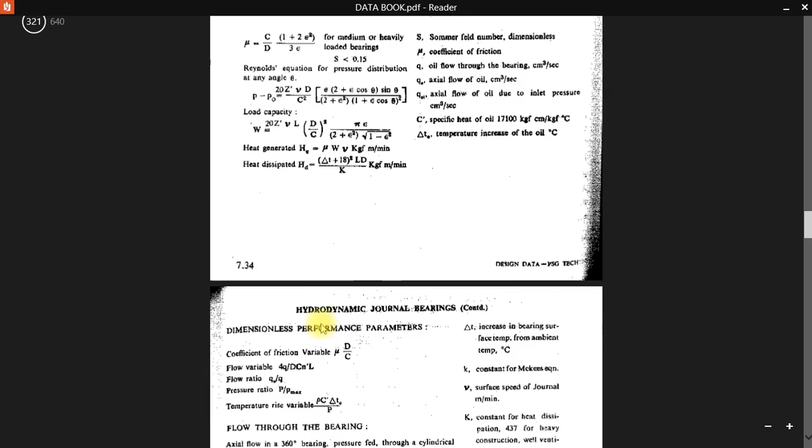So if I go back to our data book, page number 7.34, for hydrodynamic journal bearings, you can see the first formula available is the Sommerfeld number. S is the notation to represent the Sommerfeld number, which is nothing but Z dash N dash divided by P into D by C.

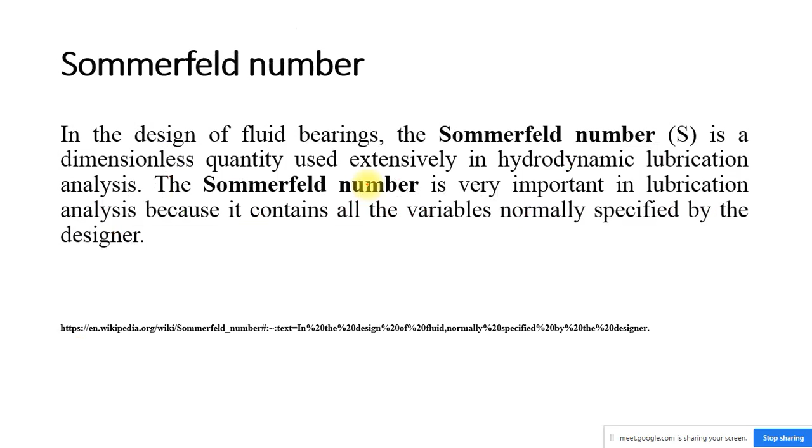So Z is nothing but the viscosity value. N is nothing but speed in revolutions per second. P is nothing but the pressure, D is nothing but the diameter, C is nothing but the diametrical clearance. So this is the definition of the Sommerfeld number.

Now let us see the difference between hydrodynamic and hydrostatic bearings. Before knowing about hydrodynamic and hydrostatic bearings, we will be seeing about fluid bearings.

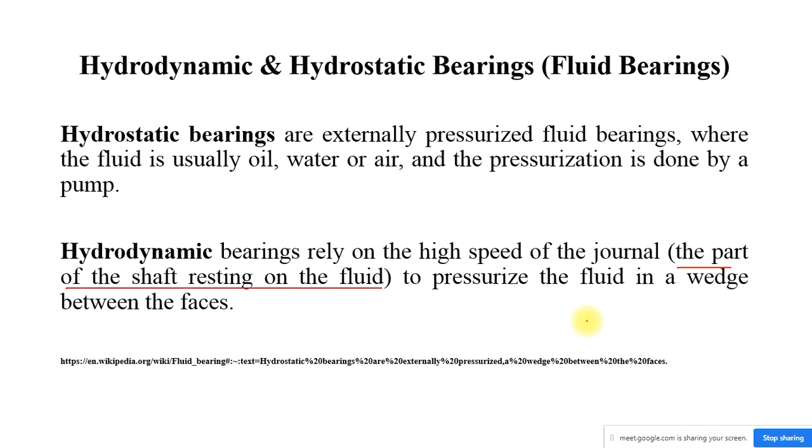Okay, so now let us go directly into a problem. Since I want to make it very clear, I will go directly into the problem for a hydrodynamic bearing. There is no difference between sliding contact bearing and hydrodynamic bearing - the only thing is it is a fluid bearing.

Either the fluid artificial cooling will be done in a continuous manner by hydrostatic, or otherwise the particular bearing will be placed inside a completely fluid environment in order to reduce the temperature. Okay, so let me go into the problem directly.

The following data is given for a 360-degree hydrodynamic bearing: radial load W is given, journal speed N is given, journal diameter capital D is given, journal length L is given.

So using this I can find out what is L by D. So I can write directly L by D is equal to 1. If it is not given in the problem, with the help of the journal diameter and the bearing length, I can write L by D is equal to 1.

So then they have given the unit bearing pressure. Even if this unit pressure is not given in the problem, I already told you how to find it out, which is P is equal to... there are some reasons why I am telling this, because if this data is not given, you should be able to identify it.

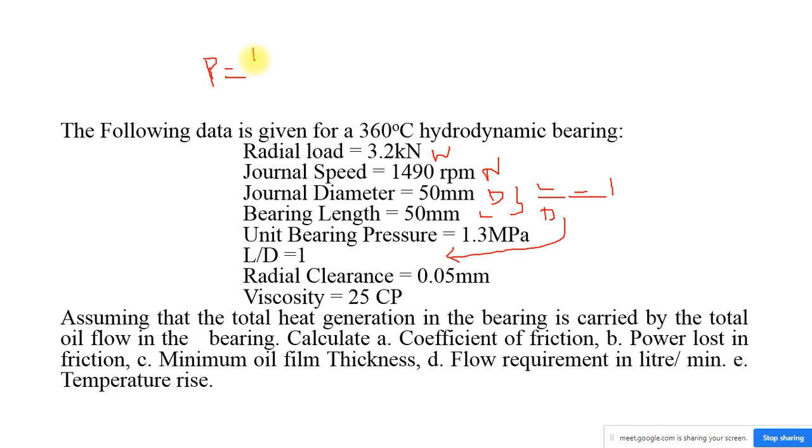So P is equal to W divided by L into D. All these three data are available - I know the W value, I know the L value, and I know the D value. If this particular unit bearing pressure is not given, this is the way you have to identify it.

Because I know the load value, I know the length value, and I know the D value. The next thing is radial clearance, which is nothing but C. The third thing is viscosity Z.

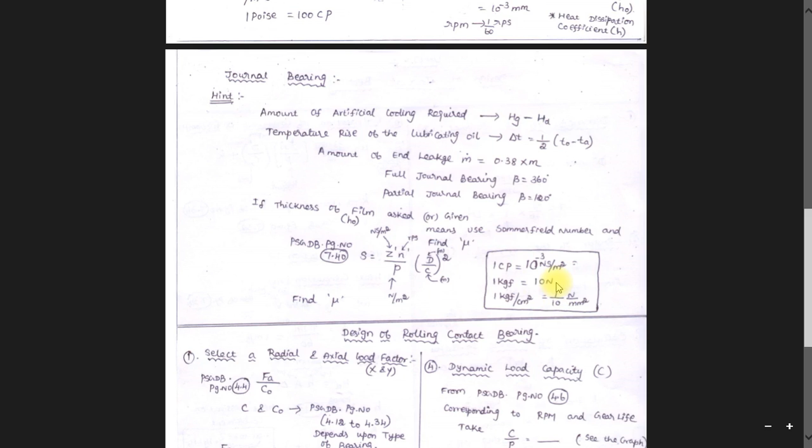Be very clear here. It is given as 25 centipoise, so the unit conversion is very important. To know about the unit conversion, Mr. Venkatesh sir has given a very clear note. See here, I hope it is visible to you. 1 centipoise is equal to 10 to the power minus 3 Newton second per meter square. I repeat, 1 centipoise is equal to 10 to the power minus 3 Newton second per meter square.

See here, the viscosity is given as 25 centipoise, so it can be written as 0.025 Newton second per meter square, which is nothing but the viscosity Z value. So everything is given very clear. You be very clear with this unit conversion, it is very important. If this part is wrong, the entire problem will be wrong, because the data book we use will be using the units in a uniform manner.

Assuming the total heat generation in the bearing is carried by the total oil flow in the bearing, so it is very clearly given that definitely I need the oil flow here.

So calculate number 1, coefficient of friction, which is nothing but mu. Power lost in friction, yes. Minimum oil film thickness, which is nothing but H naught. Flow requirement in liter per minute, which is nothing but Q. So temperature rise, either it may be del T or T naught value.

So when I read out the problem, I have been given the data: W is equal to 3.2 kilonewton, N is equal to 1490 rpm, D is equal to 50 mm, L is equal to 50 mm, unit bearing pressure P is equal to 1.3 megapascal, C is equal to 0.05 mm, Z is equal to 25 centipoise. These are the given data. As I told, what are the things to be identified, I have given over here.

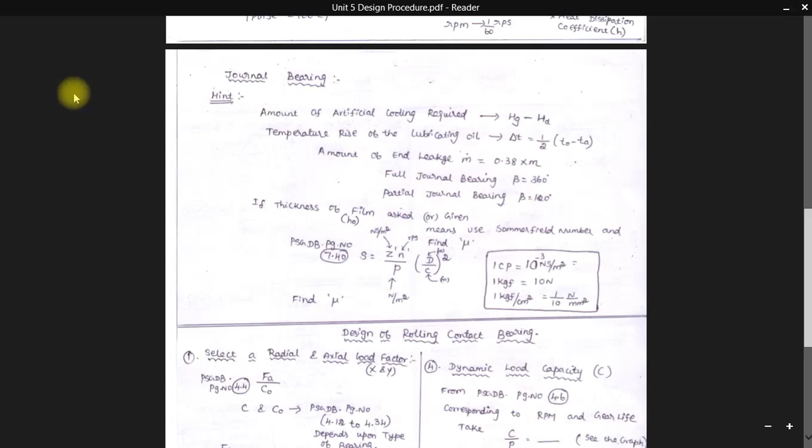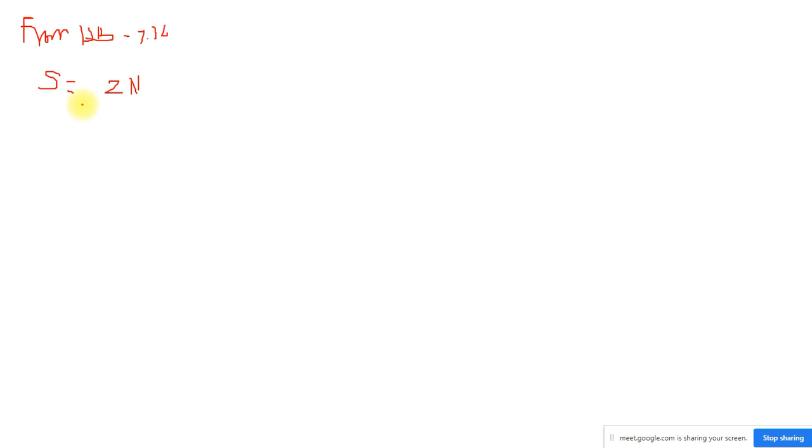So tell me what is the formula for S. You can go here and identify Sommerfeld number S is equal to Z N into D by C square, divided by P. So this is the formula. From the data book I am writing the formula: Z N divided by P, D by C the whole square. The reason why they have given a small n is that n is nothing but the revolution per minute should be in revolution per second, or the speed should be in revolution per second. That is very important.

Now I know the Z value, which is 0.025, and the revolution per second I can write here: the speed value given is 1490 divided by 60. The value of pressure is given as 1.3 megapascal, which I have to convert into Newton per meter square, so 1.3 into 10 to the 6. I hope you understood the unit conversion—it is given in megapascal, I need it in Newton per meter square. Then, into what is the D value? 50, and what is the C value?

I hope you are using your calculators and calculating it. If I identify it, the value of S would be 0.477. As I told in my explanation, it is a dimensionless value, it doesn't have any unit. I hope you understood.

I have simply solved the given data available, and what I have done differently is the RPM has been converted into revolution per second by dividing it by 60. Similarly, the pressure given in 1.3 megapascal has been converted into 1.3 into 10 to the power 6 Newton per meter square. With this I have found our Sommerfeld number.

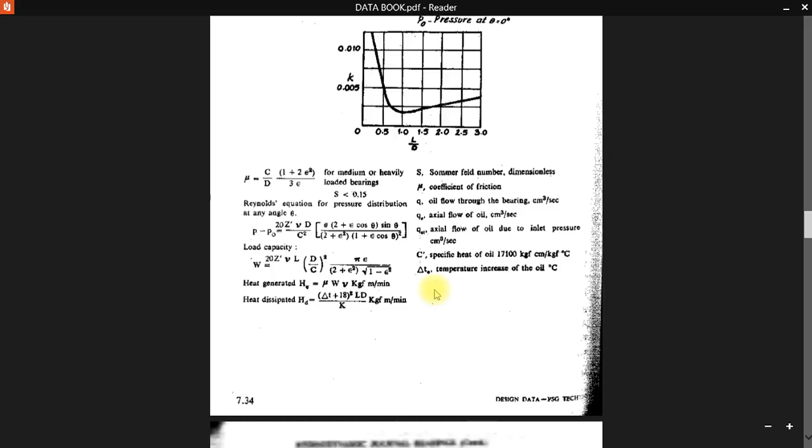Now we have to go back to our data book. Here the data book usage is very high. The L by D ratio, what we know, is 1. See here, I'm on page number 7.36, you kindly write it down. So from data book page number 7.36, for L by D is equal to 1.

For L by D is equal to 1 and S is equal to 0.477, you look in this particular column whether it is available for 0.477. When I come over here, you have 0.264 and then you have 0.631. Can anyone tell me what I should do to identify the value in between these two? I am having 0.264 and 0.631, but my value is in between these two. What should I do?

Yes? Sir. Yes, what is the method? You have studied this in your mathematics, you have done it in your thermodynamics. Yes, very good. What is that?

Interpolation. Yes, very good, interpolation is the method. If any value is in between these two, I have to do the interpolation and find out the value. I hope you know about interpolation.

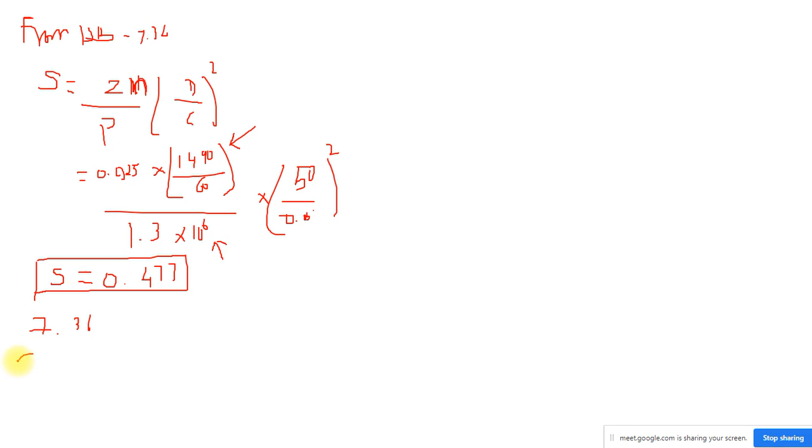So from data book page number 7.36, for S is equal to 0.477 and L by D is equal to 1, by interpolating - very important, by interpolation, which I hope you know can be done on your calculator - I will tell you the values. After interpolation, mu d by c is equal to 9.87, and similarly 4q divided by d c n dash L is equal to 3.75.

The reason they use n dash in our data book is that it is revolution per second. Then I need the other value, 2h0 by c, which is equal to 0.716. So all these values have been interpolated and identified.

Let me show you again. I need the 2h0 value, which will be around 0.6 and 0.8, so between 0.6 and 0.8 I get 0.716. Similarly, mu d by c is between 5.79 to 12.8, and I am having 9.87. And similarly for 4q dc n dash by L, it should be between 3.99 to 3.59, and I am having 3.75. I hope you understood.

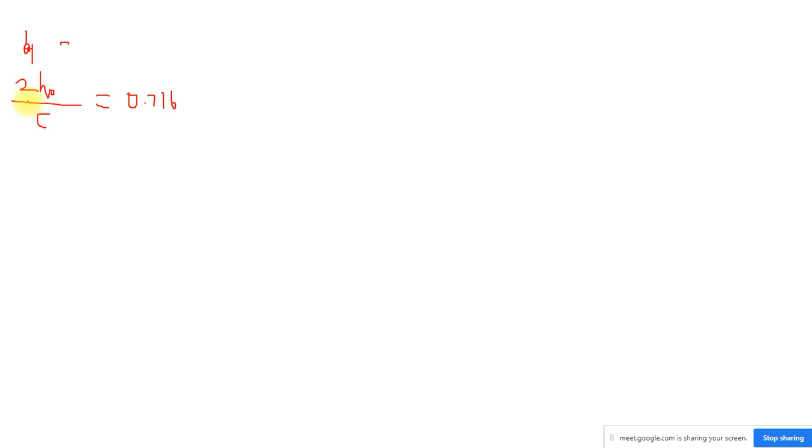I know 2 h naught by c is equal to 0.716. I need h naught, which is the oil film thickness. I repeat, oil film thickness. So it can be written as 0.716 into diametrical clearance, 0.05, divided by 2. So h naught is equal to 0.716 into diametrical clearance divided by 2.

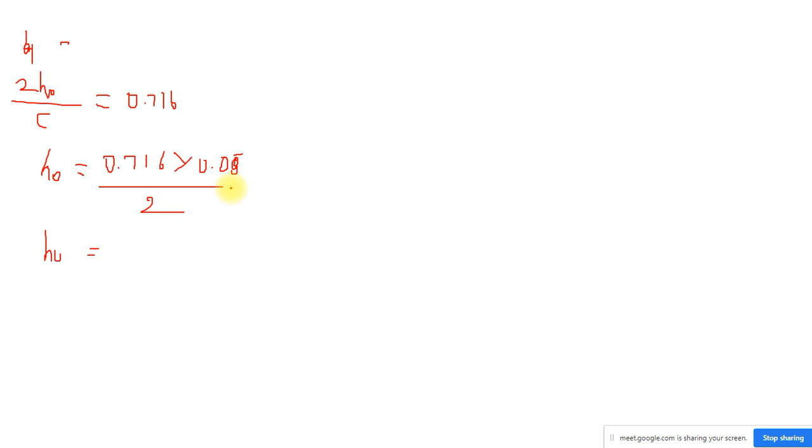If I calculate, can anyone tell me what is this value, sir? 0.716 into 0.05 divided by 2. Can anyone tell me the value which comes in millimeter? If it is to be substituted in meter, you multiply it by 10 to the power minus 3, because this diametrical clearance value will be in millimeter, 0.05 millimeter.

0.017 - yes, very good, 0.017. So this is the value h naught, which is the oil film thickness. I hope you know there will be some layer between two rotating parts. Now I have found out the second unknown, which is the minimum oil film thickness.

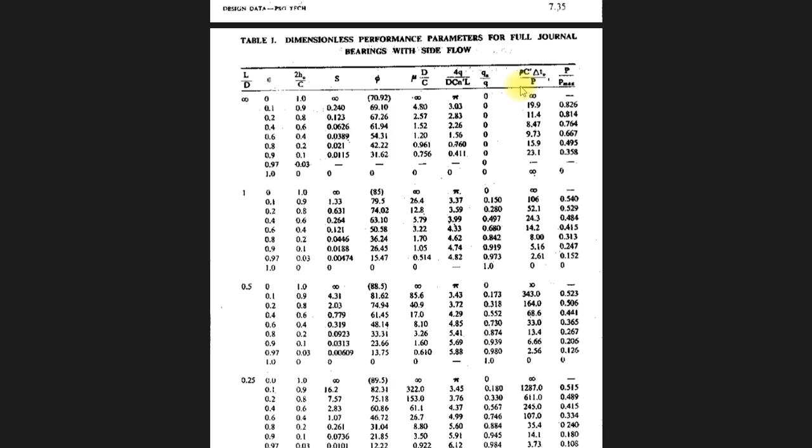Now I need to find the next data, and I forgot one value from our data book, which is rho C dash delta t naught by P. I repeat, rho C dash delta t naught divided by P. We need to find delta t naught, which is the temperature rise. So temperature rise - I'll add this value here. I can write rho C dash delta t naught divided by P.

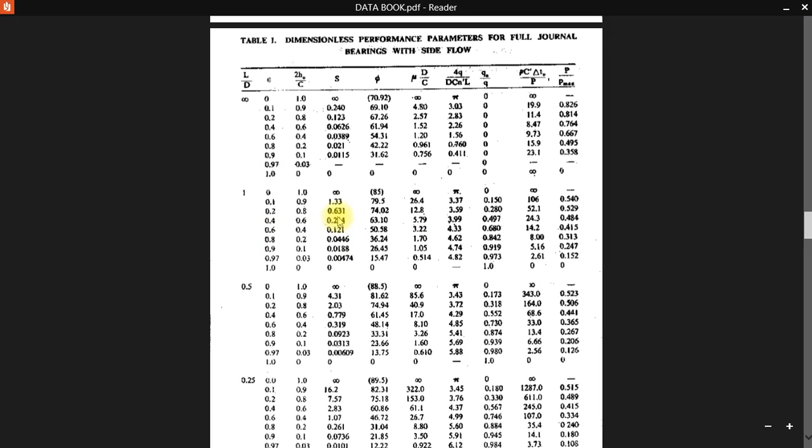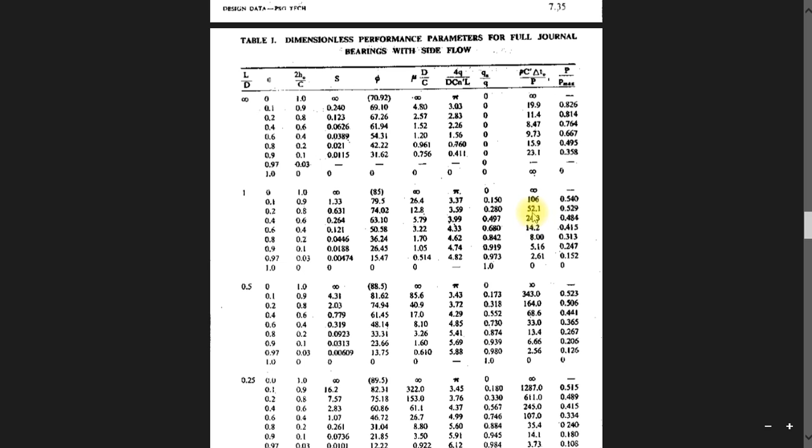If I interpolate, I get this value as 40.43. Let me tell you how this value came. Come back to your data book - I need the value in between the S value 0.264 and 0.631. If you look at this column, the value is available between 24.3 and 52.1. If I interpolate these two values, I find rho C dash delta t naught divided by P is equal to around 40.43.

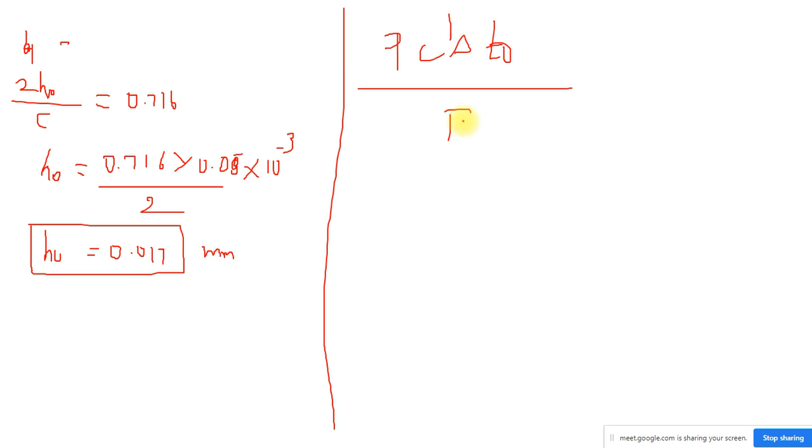Okay, so I will take this again. I am having the value of P. Let me take it as rho c dash delta t naught divided by p, which is equal to 40.43. Just a minute.

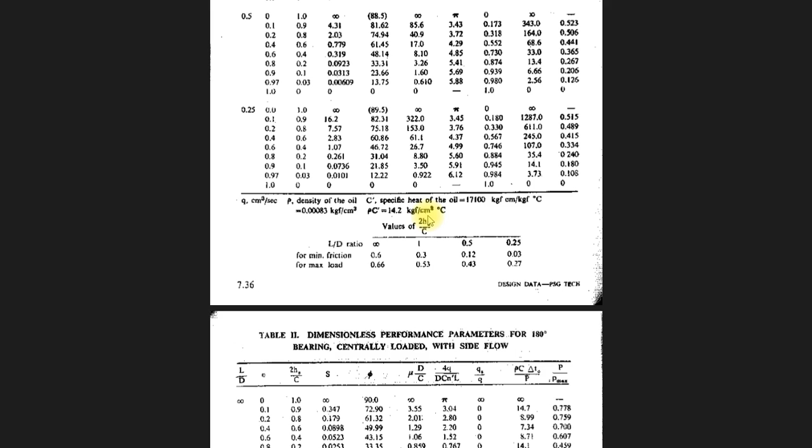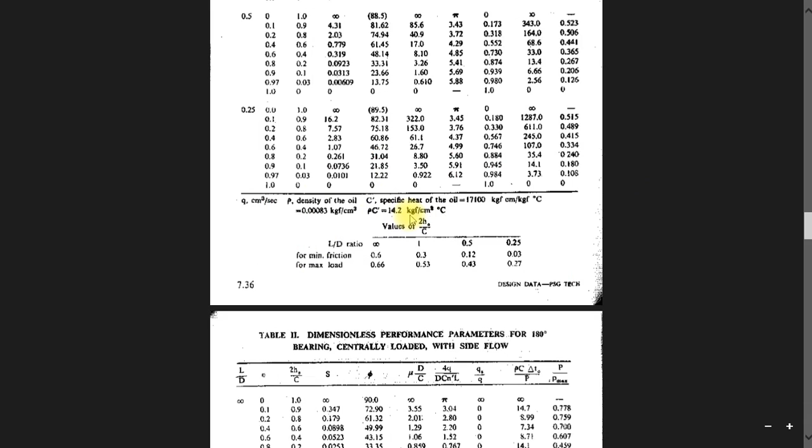I don't know what is rho C dash at all, so let us go back to our data book. You can see at the bottom - rho c dash is equal to 14.2 into kilogram f per centimeter square. But I need this value in Newton per meter square, so I need to convert it. I'll take rho into c dash as given in our data book, 14.2. To convert kilogram f into Newton, I multiply by 9.81, and to convert centimeter square to meter square, I multiply by 10 to the power 4. So 9.81 is needed to convert kilogram force into Newton. Sir, every data is available in your data book itself, sir.

I don't know del T naught, so that is the unknown. I know what is the pressure, which is nothing but 1.3 into 10 to the power 6 Newton per meter square. That is the reason why we are converting this centimeter square into Newton meter square.

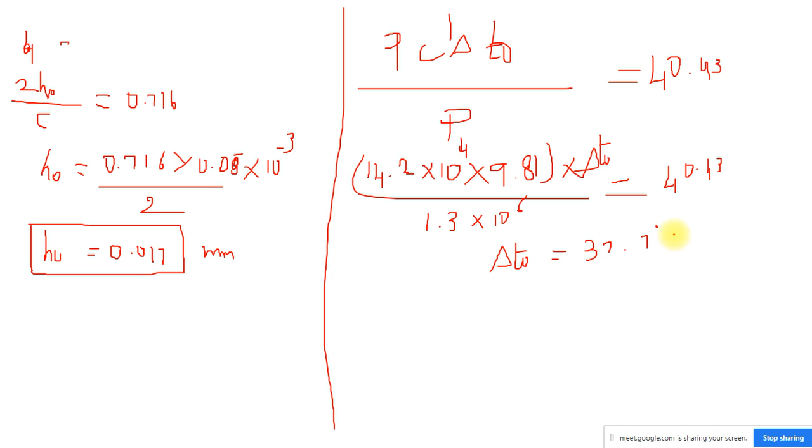Which is equal to 40.43. So here the unknown value is delta T naught. If I substitute and try to calculate, the delta T naught value would be around 37.7 degrees centigrade. I request you to kindly verify it. So this is nothing but the temperature rise.

As per our required data, we have identified the other data also, which is temperature rise. We already found out coefficient of friction. We have already found out the minimum oil film thickness. We have already found out the temperature rise. So now we need to find out what is the power lost, and what is the flow requirement. This is what we need to find out.

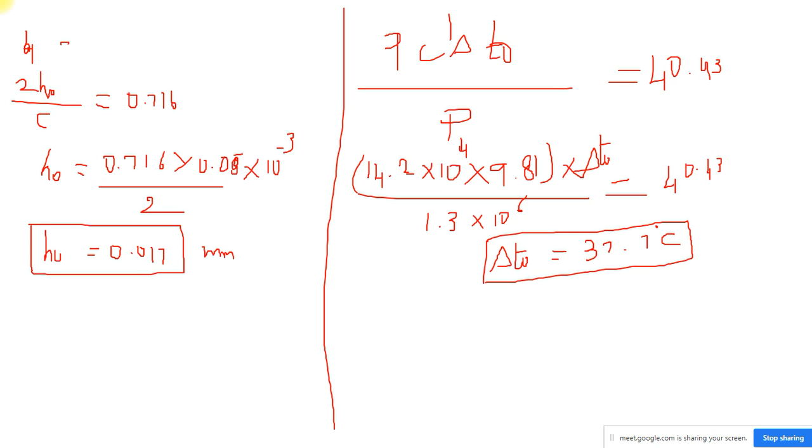So power lost is nothing but the heat generated. If heat is generated, that is the power lost in case of a bearing. What is the formula? From data book, page number 7.134, heat generated is nothing but mu into W into V.

For V, I can write V is equal to pi dn divided by 60, where we can substitute this value directly. I know the mu value, I know the load value. So what is the mu value? We already found out, which is 9.87 into 10 to the power minus 3. So you try to substitute.

9.87 into 10 to the power minus 3. The load given is 3.2 kilonewton, which is nothing but 3200 Newton, into pi into 0.05 into 1490, which is the n value, divided by 60. So I know all the values so that I can find out what is the power lost.

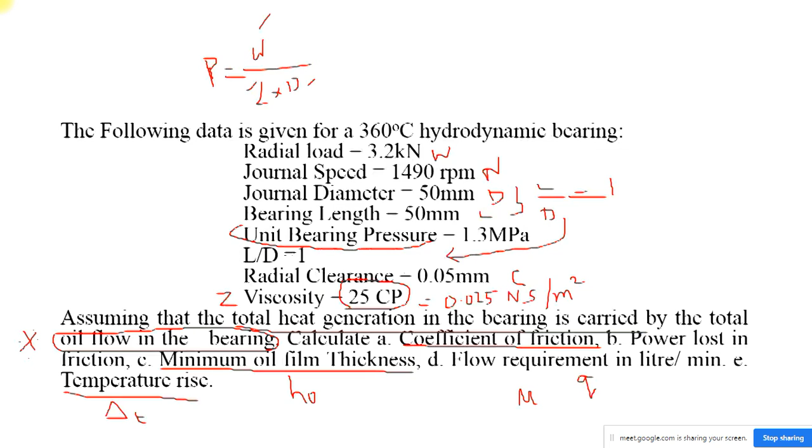Why am I saying this is a power lost? Whenever heat is generated, definitely I am going to have some power loss. If I substitute and try to find out, the value would be around 123.2 watt. Kindly calculate it and you can verify these answers. So now, as per the requirement of our question, I have found out the power lost also.

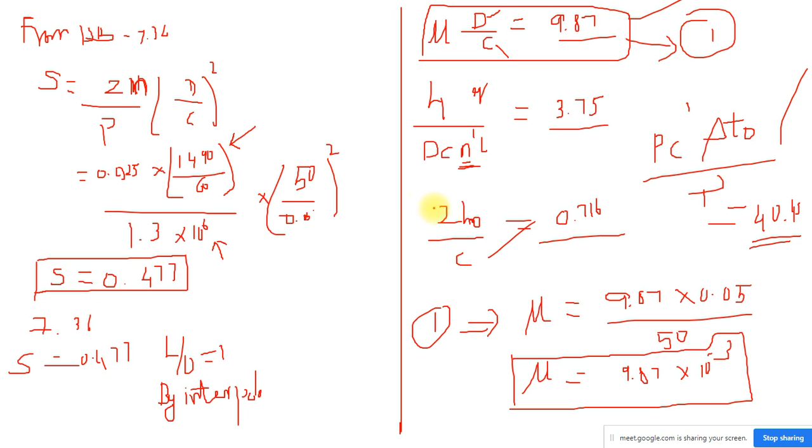So the one and only unknown is flow requirement in liter per minute. I have used this formula already; the only thing I have not used is this particular one. I can write it as 4Q divided by d c n dash l, which is equal to, as per our data book, the value is 3.75.

So Q is nothing but the data we require, which is the flow. Q is the flow we require. So Q is equal to 3.75. I have to write the diameter in terms of meter, which is 50 mm, so I can write as 0.05 meter. The C value is again 0.05.

Into 10 to the power minus 3, since I need it in meter again, into the n value, 1490 divided by 60, because I have to substitute it in RPS. And the L value is 50 mm, in meter it is 0.05 meter, divided by 4. So 3.75 is this value, D is 0.05, C is 0.05 into 10 to the power minus 3, N dash is 1490 divided by 60, into 0.05 is the length, divided by 4.

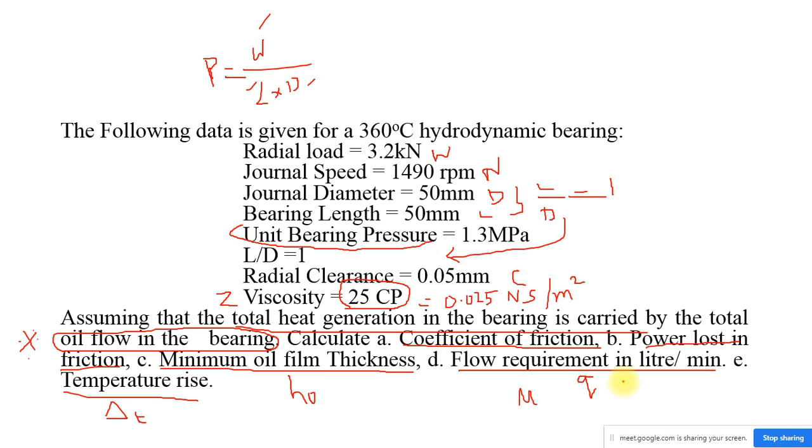Now we have found out all the unknowns asked in our problem: coefficient of friction mu, power lost in friction HD, minimum oil film thickness H0, flow requirement in liter Q, and temperature rise delta T. So with this, we have designed a hydrodynamic bearing.